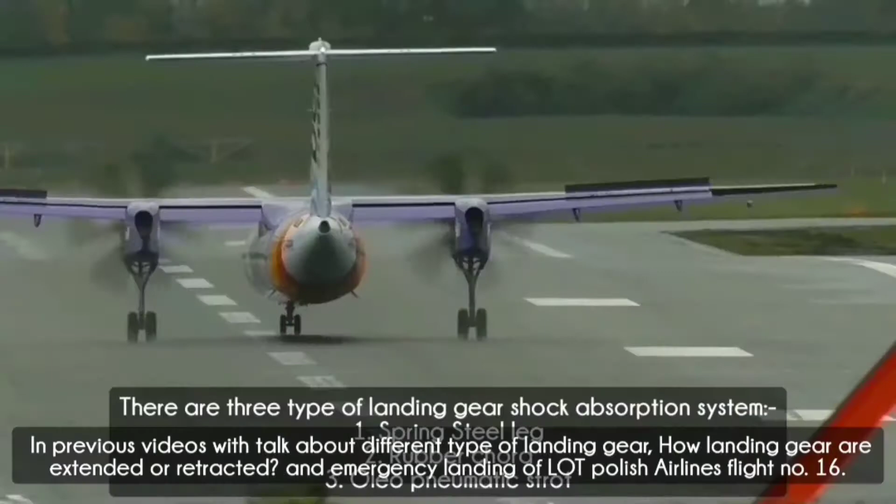In previous videos, we talked about different types of landing gear, how landing gear are extended or retracted, and we also talked about the emergency landing of LOT Polish Airlines flight number 16. Links of previous videos are given in the description section below and the i section at the top right corner.

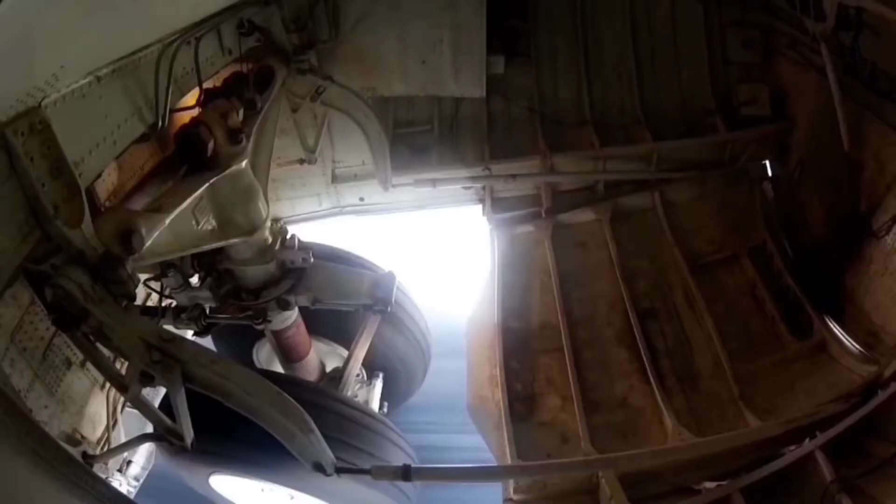In this video, we will be talking about nose landing gear, the mechanism of its operation, solutions to different problems related to nose landing gear, and we will also be talking about the emergency landing of JetBlue Airlines flight number 292. So stay tuned with us throughout the video.

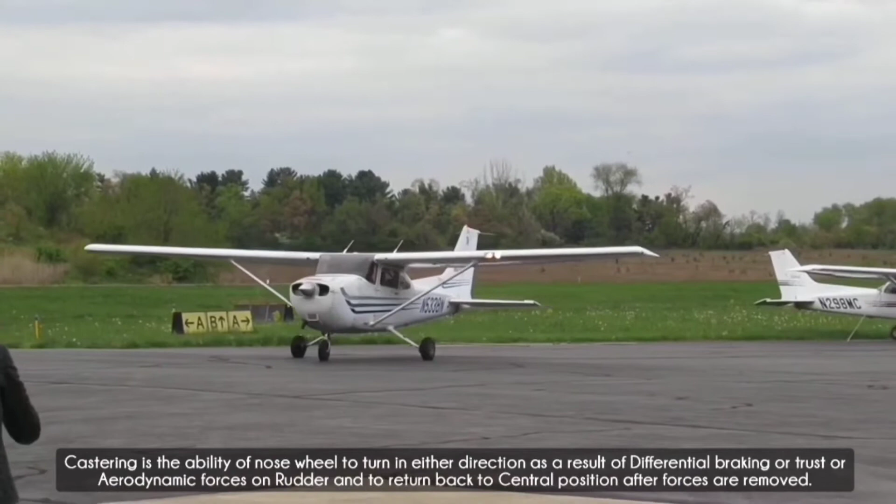Castering system is the ability of the nose wheel to turn in either direction as a result of differential braking or thrust or aerodynamic forces on the rudder, and to return back to its central position after forces are removed. This system helps to maneuver the aircraft without nose wheel steering on ground.

Steering wheel system is a hydraulically controlled system that enables the nose wheel to rotate freely according to commands provided by the pilot. This system allows the engine to be set at minimum power setting while taxiing. It helps in saving fuel and also reduces tire and brake wear, as well as reducing noise pollution.

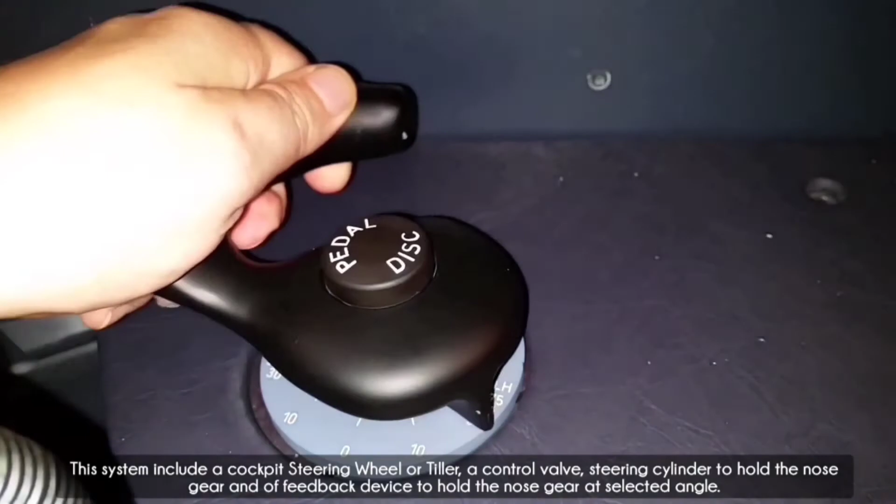This system includes a cockpit steering wheel or tiller, a control valve, a steering cylinder to hold the nose gear, and a feedback device to hold the nose gear at the selected angle.

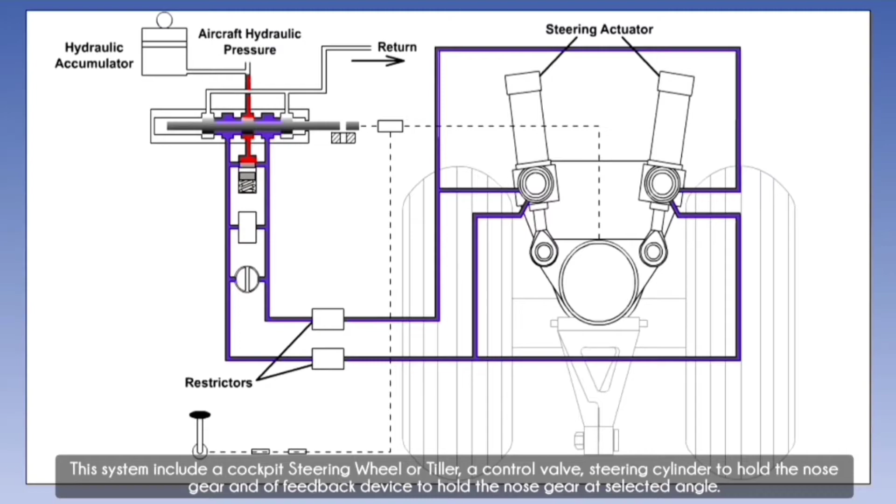An aircraft can be steered using two different processes: number one, steering wheel or tiller, and number two, rudder.

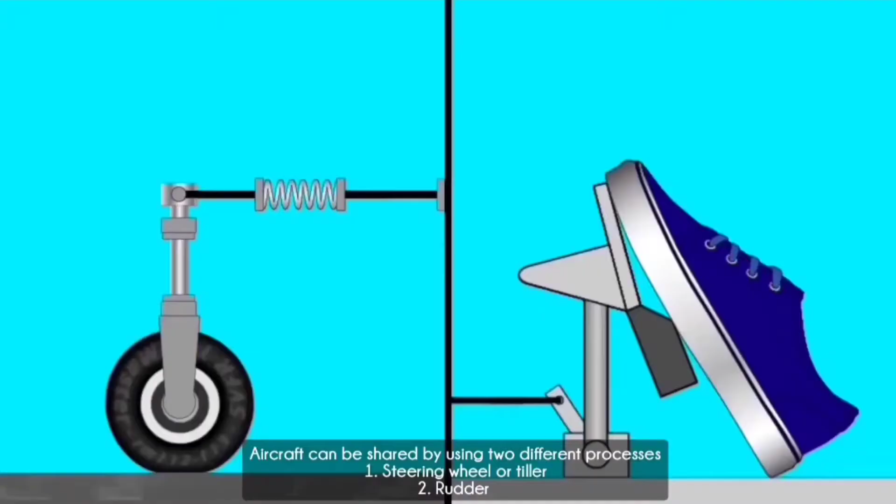With the help of the tiller, an aircraft can turn at an angle of 75 degrees on either side, which is ideal for taxiing into the gate and lining up with the runway for takeoff. As the aircraft starts its takeoff roll, the tiller input decreases with increase in speed.

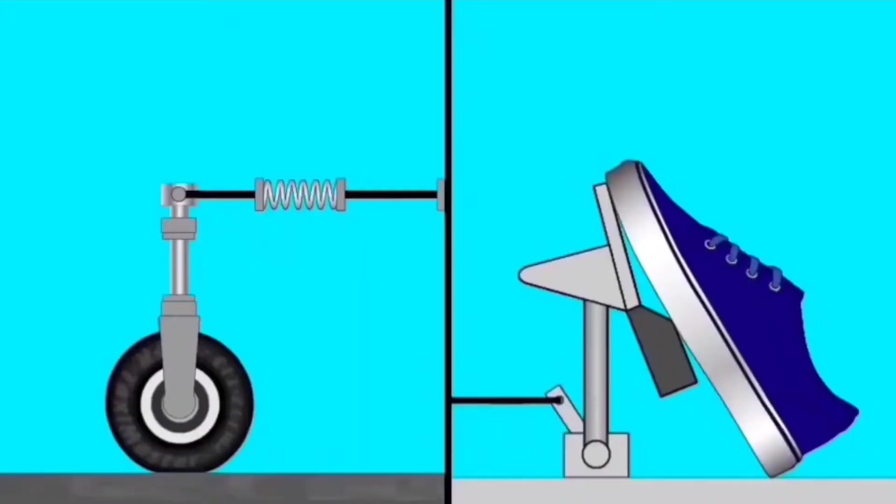So the pilot uses the rudder to control the nose wheel. The movement of the rudder is connected with the nose wheel, and the maximum deflection obtained is 6 degrees on either side. With increase in speed, the angle of deflection decreases.

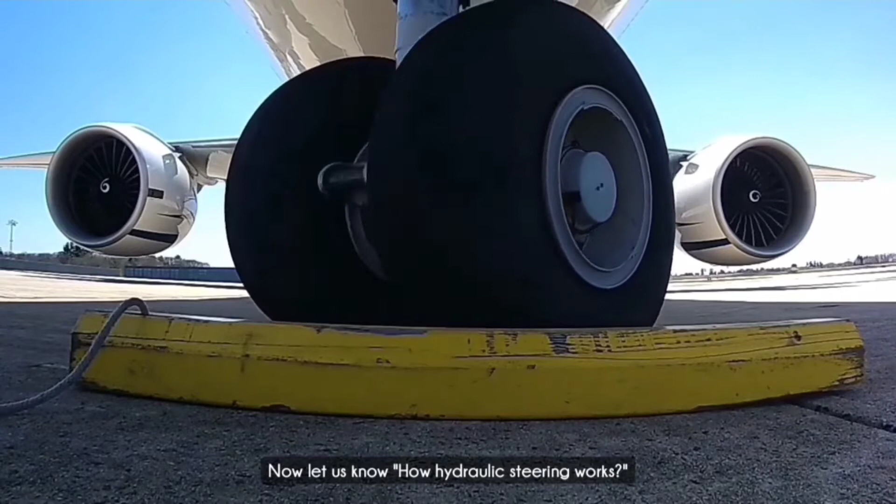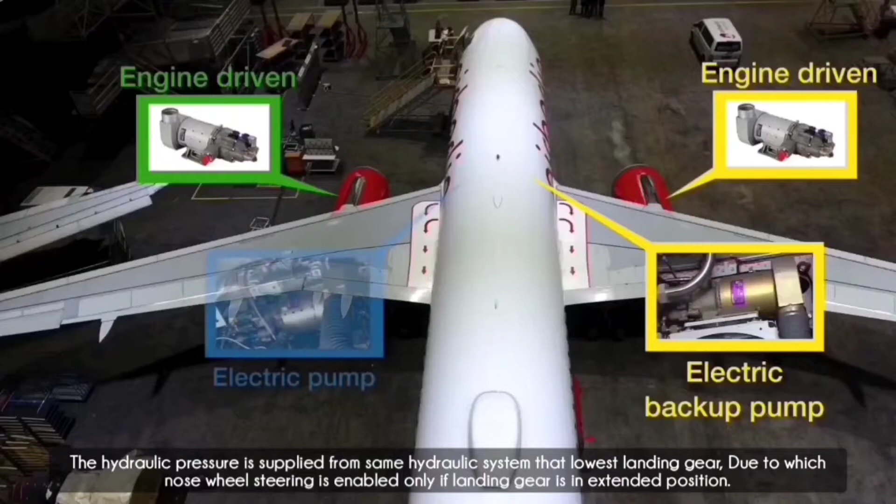Now let us know how hydraulic steering works. The operating pressure for this system is derived from the aircraft hydraulic system. The hydraulic pressure is supplied from the same hydraulic system that lowers the landing gear, due to which nose wheel steering is enabled only if the landing gear is in extended position.

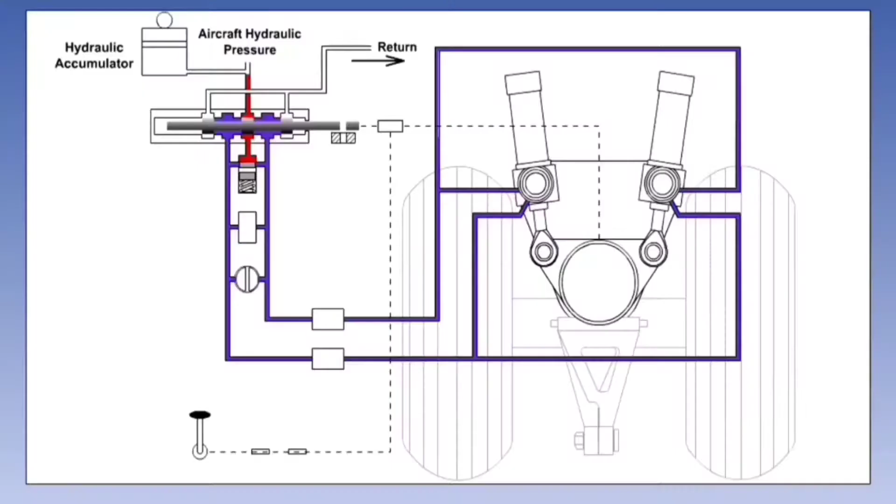There are two steering actuators that steer the nose wheel. There is a restrictor in the hydraulic pipeline between the two steering actuators. The restrictor provides dampening for the steering operation, hence preventing nose wheel shimmy. Shimmy will be explained in a later part of the video.

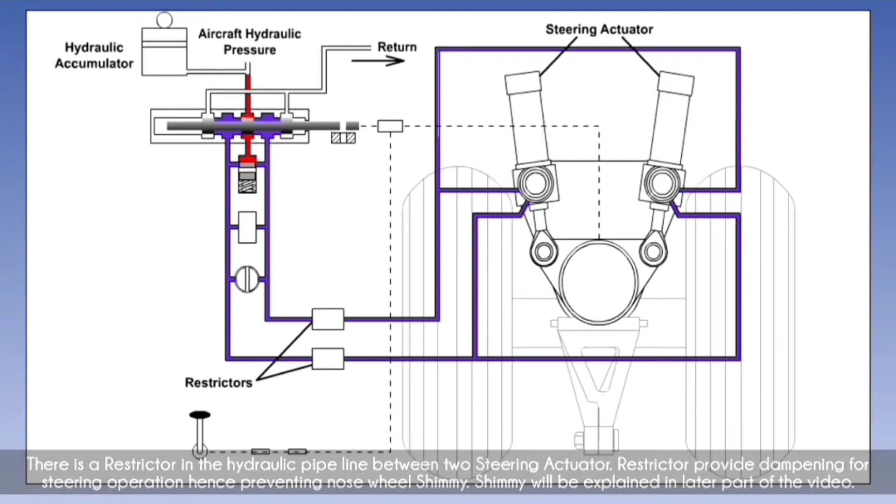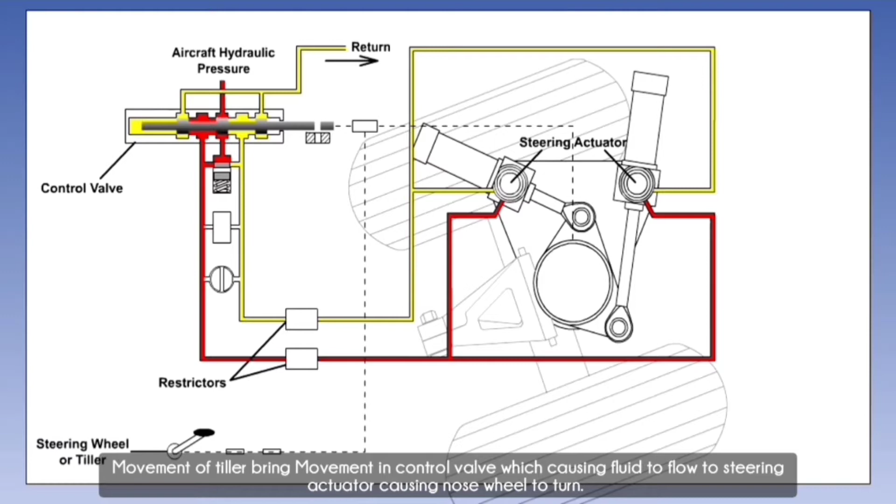The tiller from the cockpit is mechanically connected to the control valve. Movement of the tiller brings movement in the control valve, which causes fluid to flow to the steering actuator, causing the nose wheel to turn. Once the nose wheel reaches the selected angle, the follow-up linkage will centralize the control valve, hence shutting down the flow of fluid to the actuator.

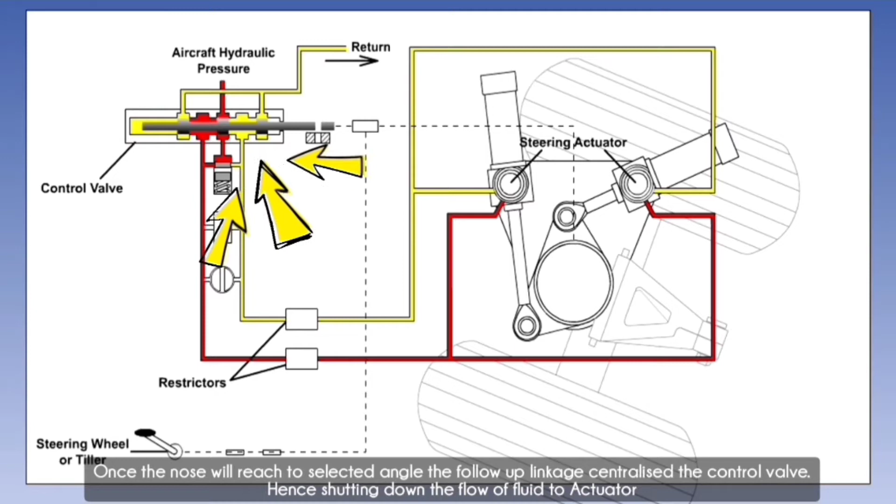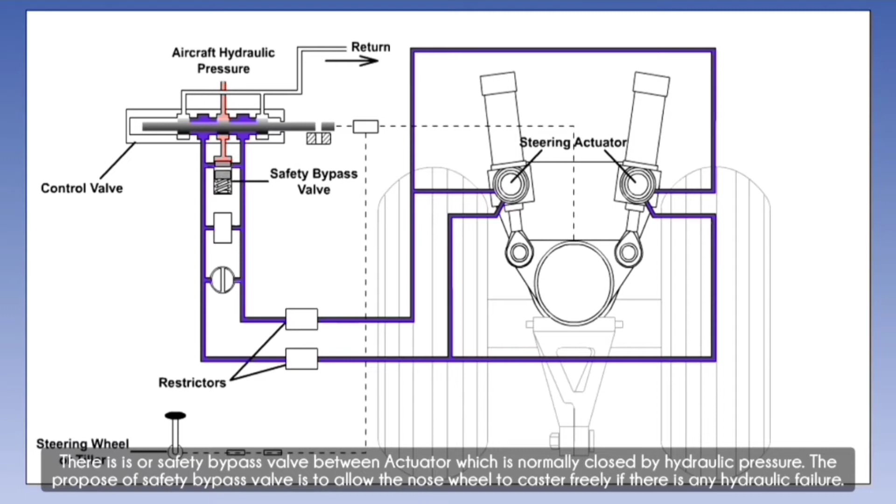There is a safety bypass valve between the actuators, which is normally closed by hydraulic pressure. The purpose of the safety bypass valve is to allow the nose wheel to caster freely if there is any hydraulic failure.

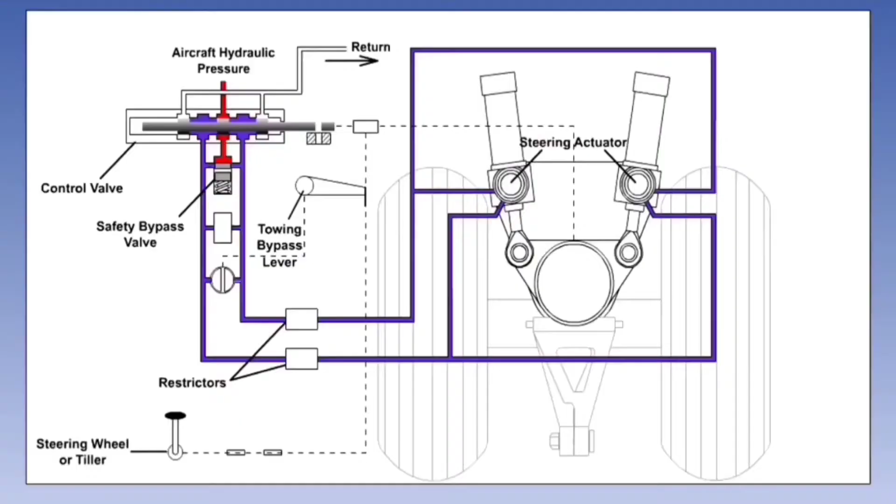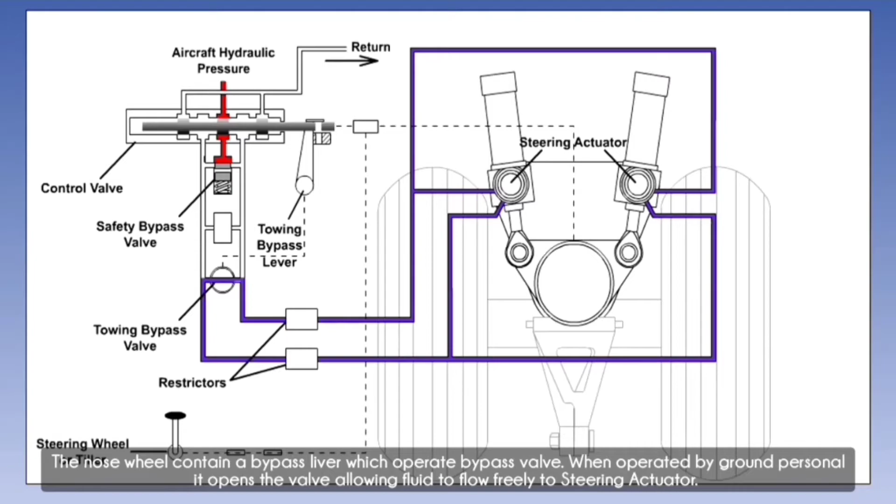Ground personnel can disconnect the steering system during towing or pushback operation. The nose wheel contains a bypass lever which operates a bypass valve. When operated by ground personnel, it opens the valve, allowing fluid to flow freely to the steering actuator. This disconnects the cockpit steering or tiller connection, thus allowing the tow truck to maneuver the aircraft freely.

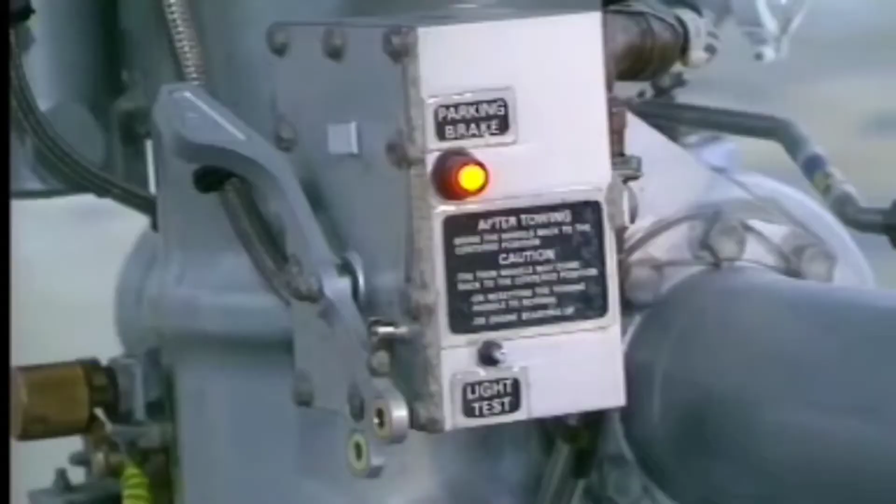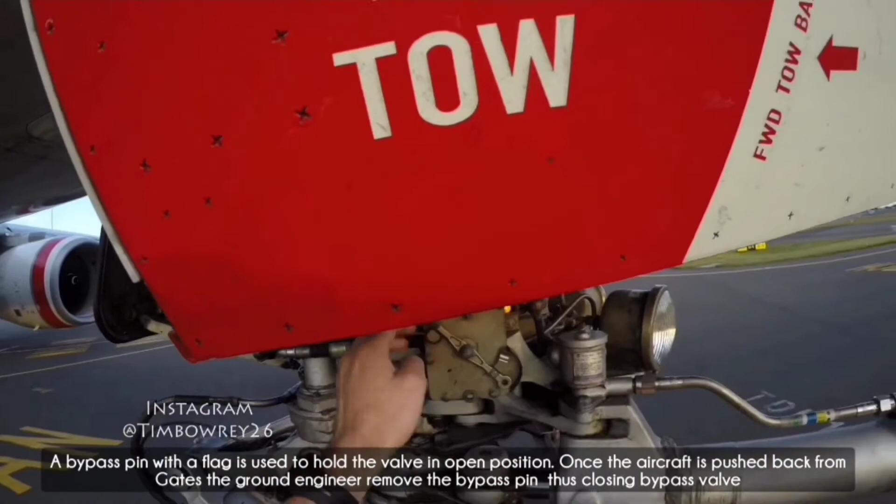A bypass pin with a flag is used to hold the valve in open position. Once the aircraft is pushed back from its gate, the ground engineer removes the bypass pin, thus closing the bypass valve. The ground engineer needs to show the bypass pin to the pilot after completion of the towing operation. This step ensures the pilot that they can operate the nose wheel steering freely.

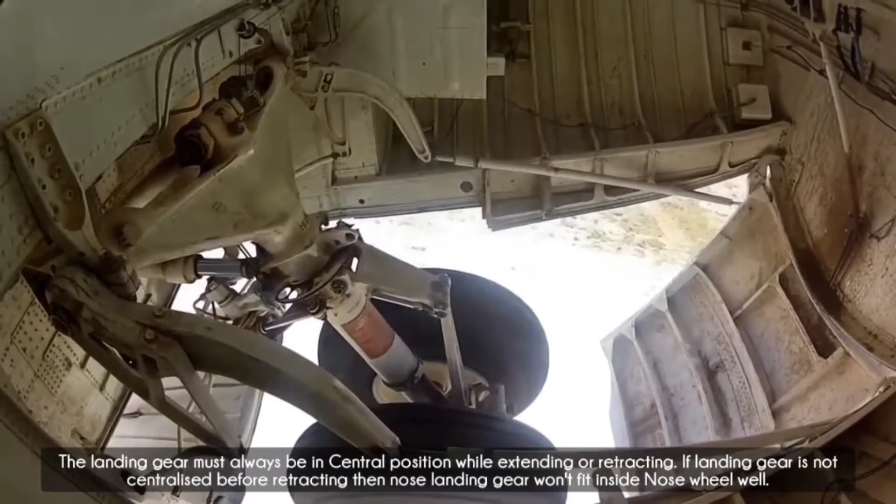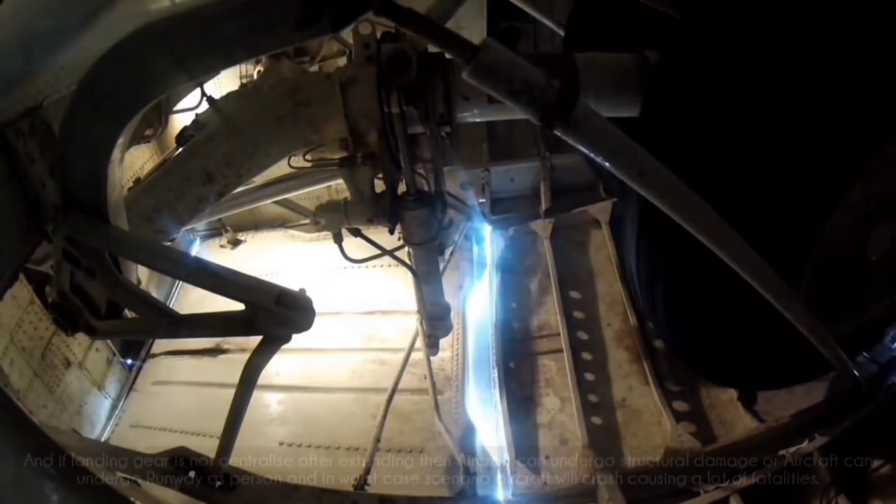Now let us talk about problems for the nose wheel gear unit. The landing gear must always be in central position while extending or retracting. If the landing gear is not centralized before retracting, then the nose landing gear won't fit inside the nose wheel well, and if the landing gear is not centralized after extending, then the aircraft can undergo structural damage or a runway excursion, and in the worst case scenario, the aircraft will crash, causing a lot of fatalities.

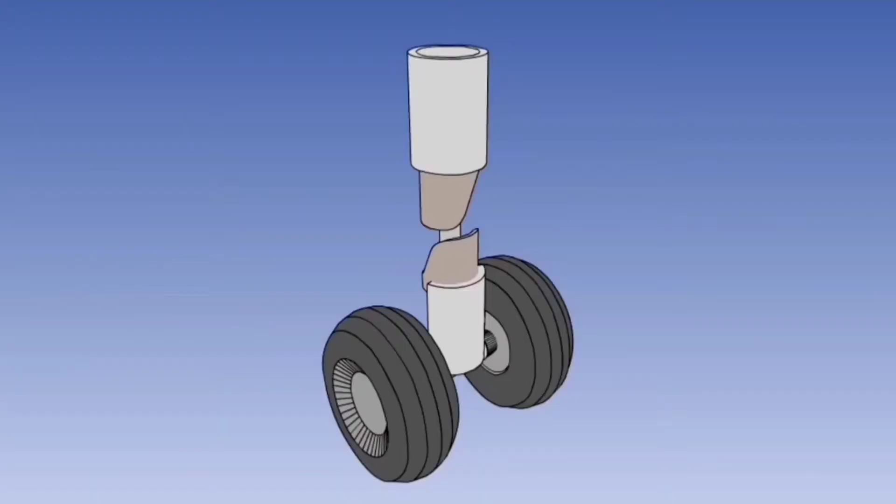The landing gear is centralized either by a cam system or by hydraulic power being applied to both steering actuators.

Another major problem for the nose wheel is shimmy. Shimmy is an unstable, rapid and oscillating vibration. It can be caused due to flexibility of tire sidewalls, broken torque link, wear in wheel bearing, and uneven tire pressure increases the tendency to shimmy.

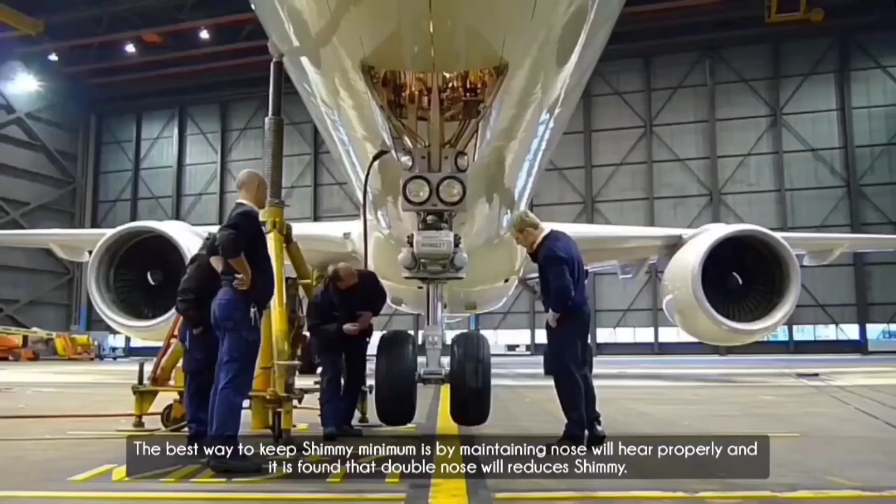Excessive shimmy at high speed can set up vibration throughout the aircraft and can be dangerous as well. The best way to keep shimmy minimum is by maintaining the nose landing gear properly, and it is found that a double nose wheel reduces shimmy. Larger aircraft with multi-wheel connections face a major problem of sliding main gear while turning, which is known as scrubbing.

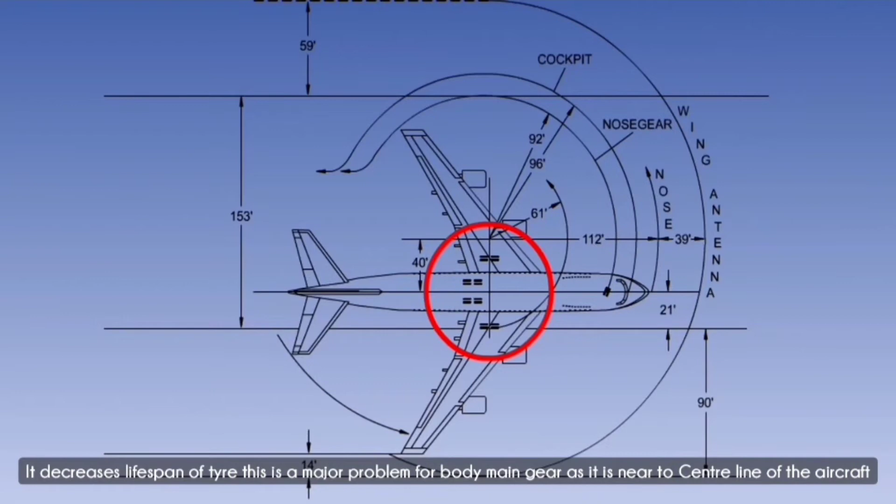Scrubbing decreases lifespan of tires. This is a major problem for the body main gear unit as it is nearer to the central line of the aircraft.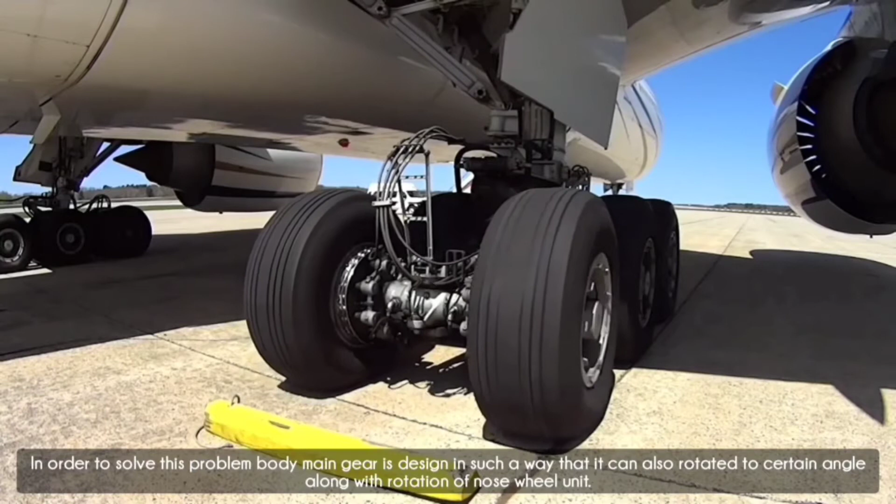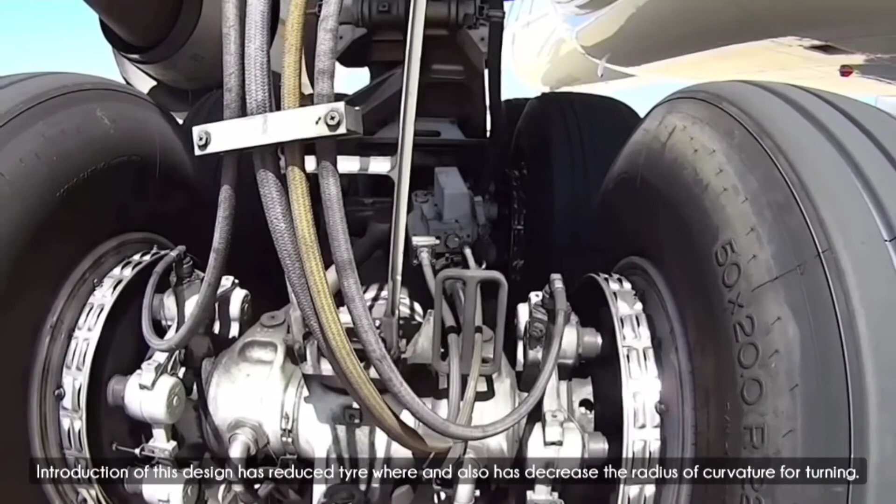In order to solve this problem, the body main gear unit is designed in such a way that it can rotate to a certain angle along with the rotation of the nose wheel unit. Introduction of this design has reduced tire wear and also decreased the radius of curvature for turning.

In our videos, we not only provide you all information about different topics of the aviation industry, we also talk about a crash or emergency situation related to the same topic. Similarly, today we will be talking about the emergency landing of JetBlue Airlines flight number 292.

September 21, 2005. Los Angeles International Airport, California, United States. It was a normal busy day at LAX. But all of a sudden, an aircraft was spotted circling over the Pacific Ocean for over an hour. It was JetBlue Airlines flight number 292.

The aircraft was suffering from an unusual situation of a rotated nose landing gear wheel. The wheel was rotated at an angle of 90 degrees and it was perpendicular to the central line of the aircraft. The aircraft was preparing itself for an emergency landing at Los Angeles International Airport.

JetBlue Airlines flight number 292 originated from Bob Hope Airport, Burbank, California, and was en route to John F. Kennedy International Airport, New York. The aircraft was an Airbus A320-200 carrying 146 people on board.

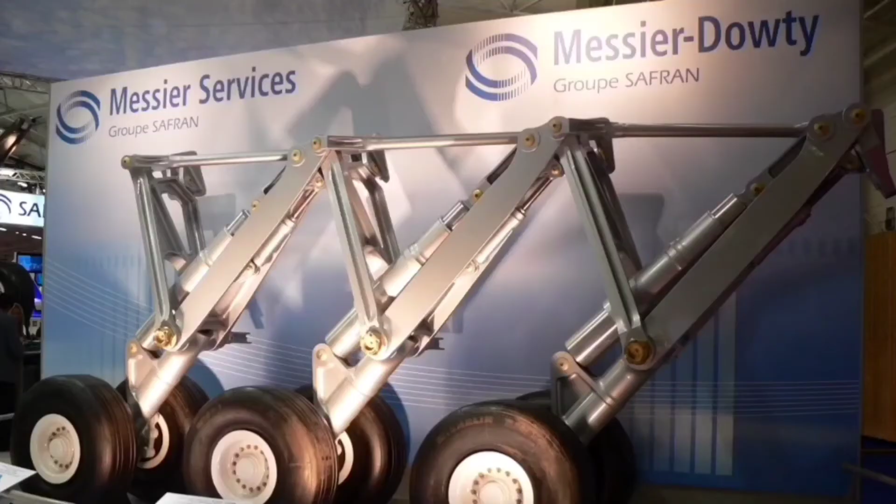Messier-Dowty, which manufactured the nose gear assembly for the Airbus A320, stated in an NTSB report in 2004 that a part of the gear had been redesigned to prevent future problems, but at the time of the incident, the redesign was awaiting approval.

Mechanics familiar with the common fault usually replace or reset the brake steering control unit, or BSCU computer. The NTSB report says worn out seals were blamed for the malfunction and that the BSCU system contributed to the problem. The NTSB reported that Airbus had upgraded the system to take care of the problem.

After this incident, JetBlue's flight from Burbank to New York was renumbered from 292 to 358.